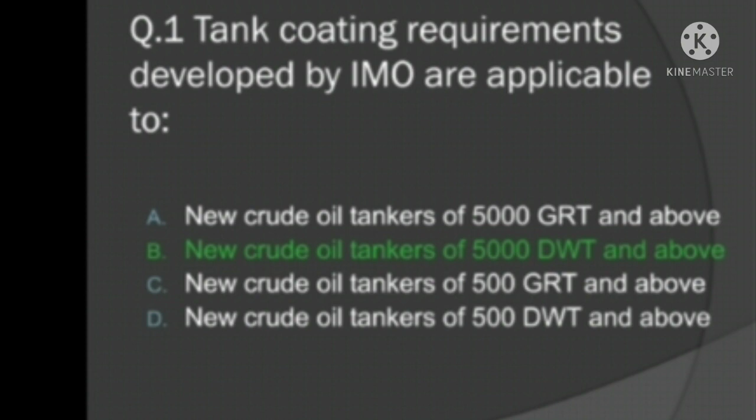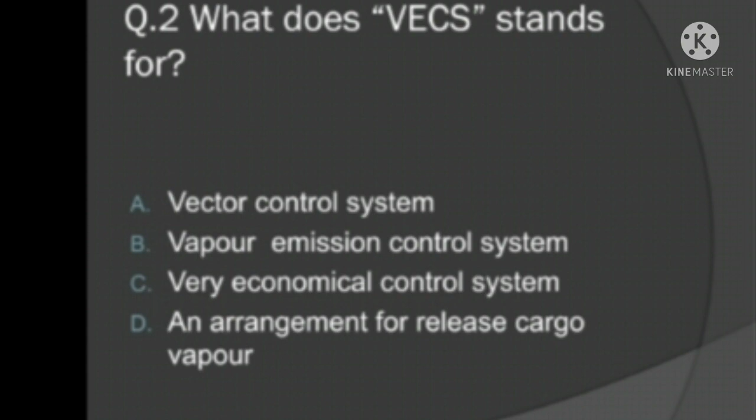Vapor Emission Control System. The purpose of a cofferdam between two compartments is to: option A. Store tools and equipment that are necessary for the adjacent compartments. Option B. Give access to the bulkhead for inspection and repairs when the tanks are full with liquid. Option C. Keep a reserved space if capacity of either compartment needs to be increased. And option D. Prevent different liquid from the two tanks coming in contact in case of a leak. The correct answer is option D. Prevent different liquid from the two tanks coming in contact in case of a leak.

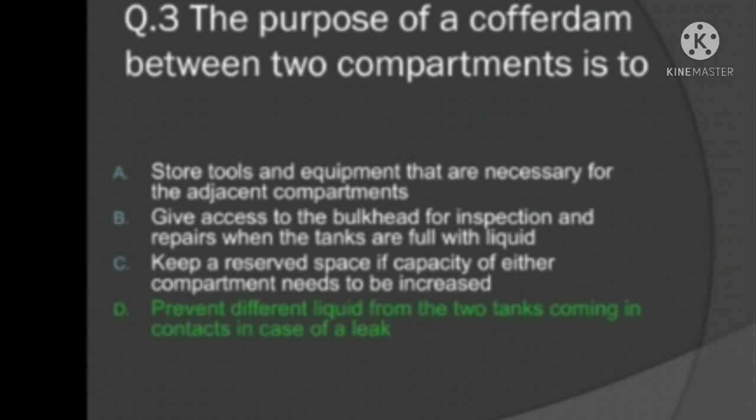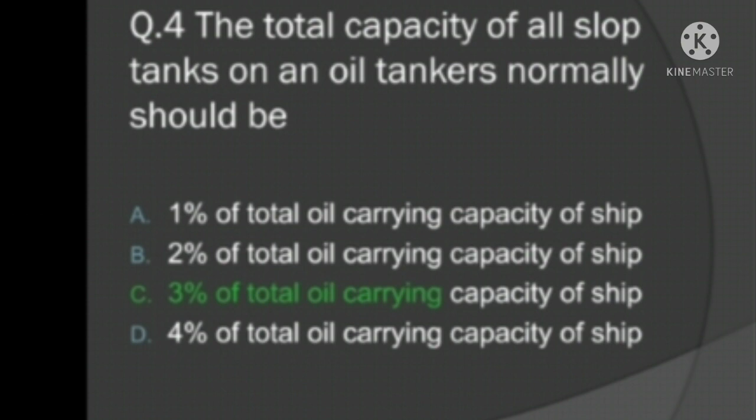The total capacity of all slop tanks of an oil tanker normally should be: option A. 1% of total oil carrying capacity of ship. Option B. 2% of total oil carrying capacity of ship. Option C. 3% of total oil carrying capacity of ship. And option D. 4% of total oil carrying capacity of ship. The correct answer is option C. 3% of total oil carrying capacity of ship.

Which category of NLS chemical in bulk poses maximum threat? Option A. Y. Option B. OS. Option C. X. And option D. Z. The right answer is option C. X. Which pump must always be primed? Option A. Centrifugal pump. Option B. Reciprocating pump. And option C. Rotary pump. The correct answer is option A. Centrifugal pump.

Which of the following is the cofferdam? Option A. Chain locker. Option B. Pump room on an oil tanker. Option C. Deep tank. And option D. Slop tank on an oil tanker. The correct answer is option B. Pump room on an oil tanker.

In chemical tankers, the coding system used by IBC code for an independent tank is: option A. 1, option B. 2, option C. G, and option D. P. The correct answer is option A.

1. Cargo tanks fill alarm indicator panels: Option A. Are normally fitted on the bridge and sometimes on deck. Option B. Are normally fitted in the engine control room and sometimes on deck. Option C. Are normally fitted on the bridge and sometimes in the engine control room. And option D. Are normally fitted in the cargo control room and sometimes on deck. The correct answer is option D. Are normally fitted in cargo control room and sometimes on deck.

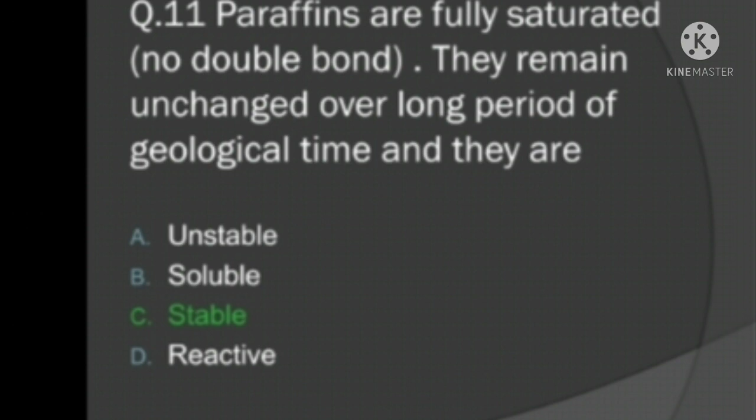Paraffins are fully saturated. They remain unchanged over a long period of geological time, and they are: option A. Unstable. Option B. Soluble. Option C. Stable. And option D. Reactive. The correct answer is option C. Stable. Paraffins are pure hydrocarbons containing: option A. Only hydrogen. Option B. Only carbon. Option C. Hydrogen and carbon. Option D. Bromine. The correct answer is option C.

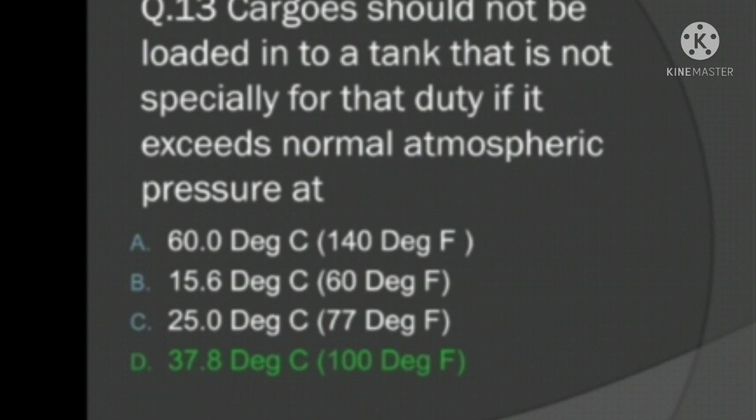Hydrogen and carbon. Cargoes should not be loaded into a tank that is not specially for that duty if it exceeds normal atmospheric pressure at: option A. 60.0 degrees Celsius. Option B. 15.6 degrees Celsius. Option C. 25.0 degrees Celsius, and option D. 37.8 degrees Celsius. The correct answer is option D. 37.8 degrees Celsius.

The most stable naphthenic hydrocarbons are the naphthene rings with option A. 7 and 8 carbon atoms, option B. 2 and 4 carbon atoms, option C. 5 and 6 carbon atoms, and option D. 4 and 7 carbon atoms. The correct answer is option C. 5 and 6 carbon atoms.

Sublimation is the phase transition of a substance: option A. from the liquid to the solid phase, option B. from the solid to the liquid phase, option C. from the gas phase to the solid phase, and option D. from the solid to the gas phase. The correct answer is option D. From the solid to the gas phase.

Vapor pressure in cargo tanks is affected by option A. type of cargo, option B. density of cargo, option C. temperature of cargo, and option D. inert gas. The correct answer is temperature of cargo.

The contents of cycloparaffins in petroleum may vary: option A up to 16%, option B up to 70%, option C up to 35%, and option D up to 15%. The correct answer is option A, up to 16%.

The important series of hydrocarbons found in almost every petroleum mixture from any part of the world is: option A paraffins, option B aromatic, option C ethylene, and option D naphthene. The correct answer is option B, aromatic.

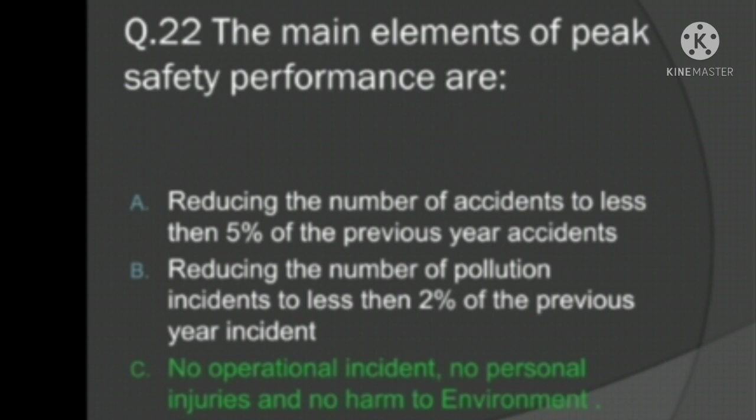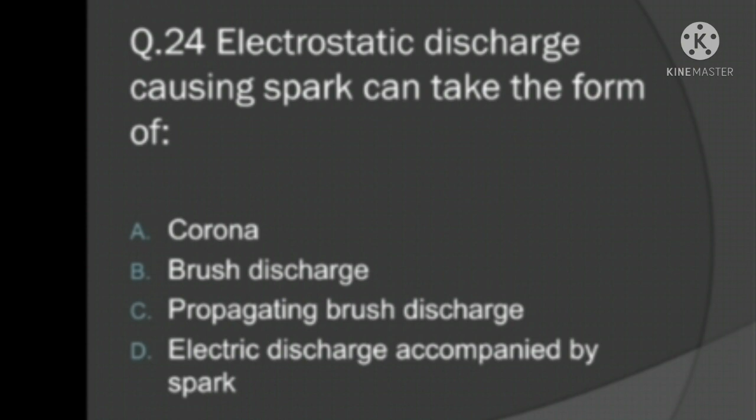Electrostatic discharge causing spark can take the form of: option A corona, option B brush discharge, option C propagating brush discharge, and option D electric discharge accompanied by spark. The correct answer is option D, electric discharge accompanied by spark.

Major danger occurs from a vapor cloud if it is: option A dissipated in atmosphere, option B reduced in vapor concentration, option C ignited. The correct answer is option C, ignited.

What is cargo inhibition? Option A: all chemical cargo physical and chemical properties change during transportation. To avoid this, certain inhibitors are added in the cargo. Option B: for some chemical cargo, under heat and in presence of oxygen, their physical and chemical properties change. To avoid this, certain inhibitors are added to the cargo. Option C: adding inhibitors to a refined vegetable oil adds to its market value as the inhibitors maintain its color. The correct answer is option B. For some chemical cargo, under heat and in presence of oxygen, their physical and chemical properties change. To avoid this, certain inhibitors are added to the cargo.

Inert gas is introduced to cargo tanks to: option A lower the LEL of cargo vapor, option B make the cargo vapor a lean mixture of hydrocarbons, option C exclude oxygen and thus prevent fire or explosion. The correct answer is option C, to exclude oxygen and thus prevent fire or explosion.

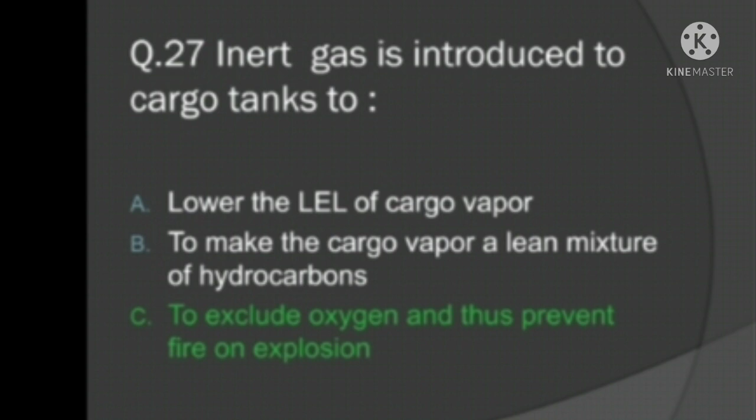What is runaway polymerization? Option A: exothermic self-reaction. Option B: self-reaction. Option C: endothermic self-reaction. And option D: both exothermic and endothermic reaction. The correct answer is option A,

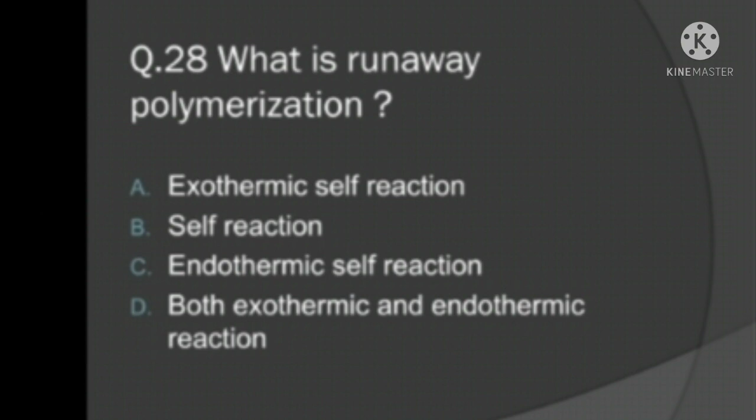exothermic self-reaction. Electrons have: option A no charge, option B positive charge, and option C negative charge. The correct answer is option C,

negative charge. How to reduce hydrogen sulfide hazard in residual fuel oils? Option A: ventilation to lower the concentration of vapor in the ullage space and in specific areas where vapors may accumulate should be carried out as soon as practicable. Option B: transfer the oil to some other tanks using the fuel transfer pump. Option C: keep heating the oil to maintain a higher temperature. Option D: circulate the oil in the same tank using the cargo pump. The correct answer is option A. Ventilation to lower the concentration of vapor in the ullage space and in specific areas where vapors may accumulate should be carried out as soon as practicable.